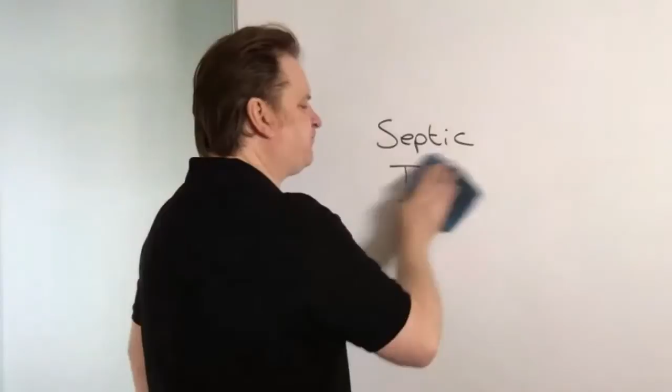All right, I'm going to give you a very, very good tip today. This is a very good tip in light of the septic tank ban that comes into force on the 1st of January 2020. I'm going to show you how to convert your septic tank into a legal, clean, safe system.

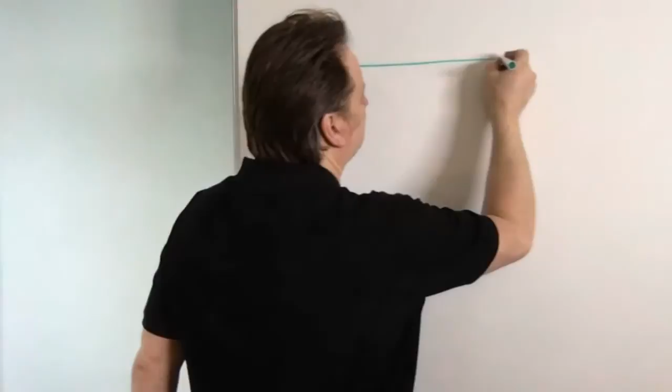So you're ready for this? Okay, here we go. So let's start off with some grass, right? All right, so that's some grass, okay.

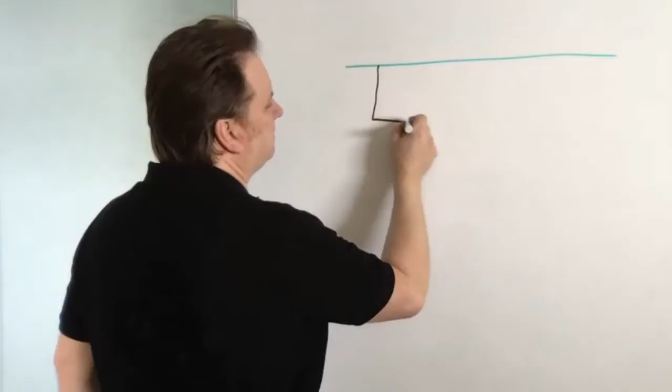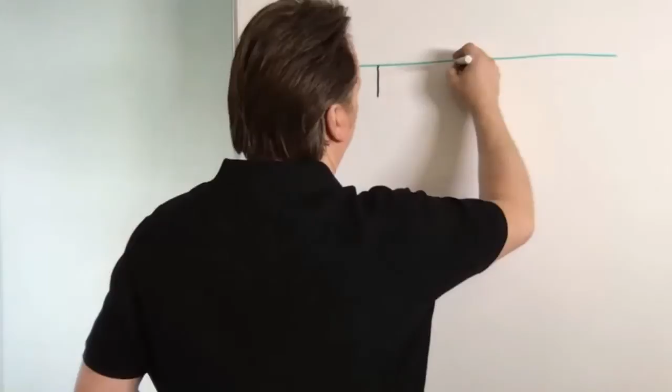And here, let's say, is your septic tank, okay? It's a bit skew-whiff, isn't it? But as you can tell, if you've been watching my broadcasts the last few weeks, art was never my forte. But let's try that again. That's a bit better, isn't it? All right, so let's say that's your septic tank.

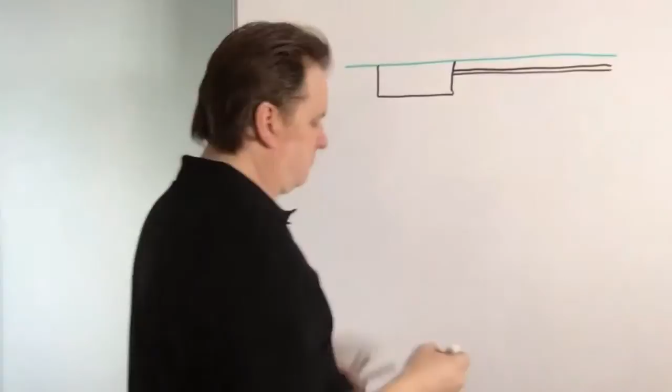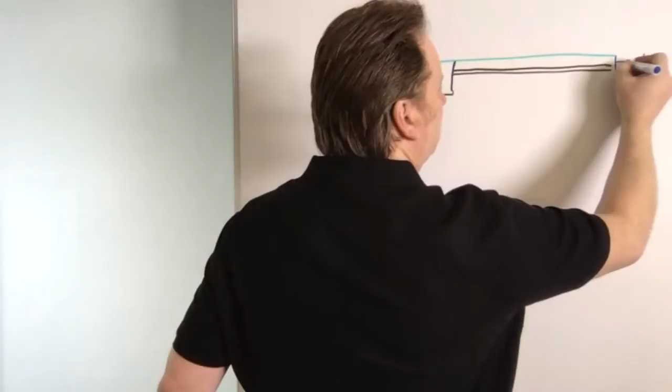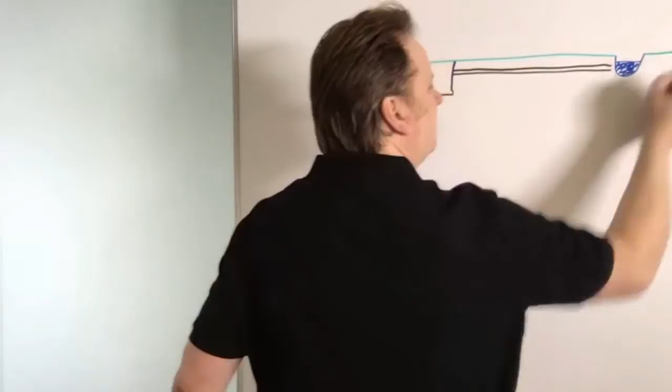Let's say this is your soakaway, okay? And let's say, right, this is... let's say that's the watercourse. So by watercourse, I mean river, stream, ditch, whatever, culvert, brook. Point is, it's a watercourse and the water goes somewhere. Okay, so in fact, let's just do that a bit higher. There we go. All right, so this is the inlet coming in.

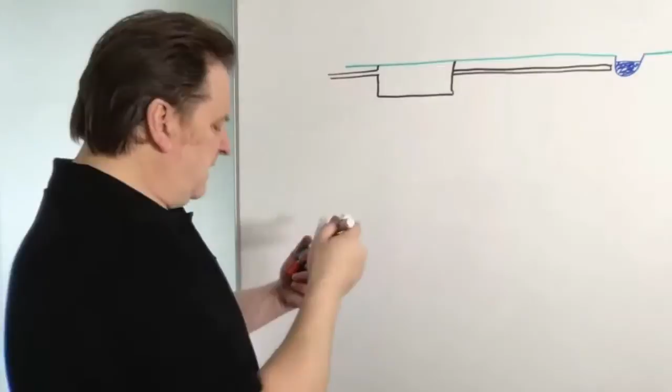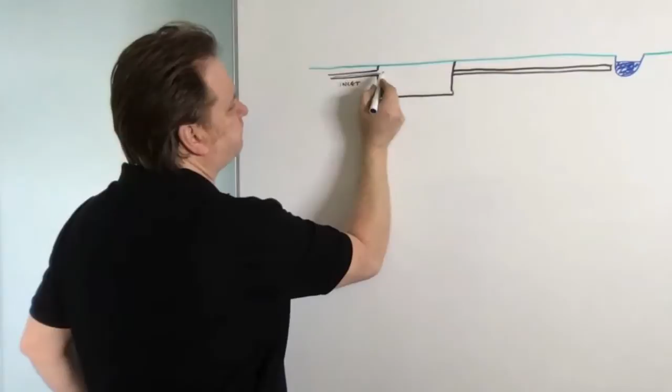To the septic tank, that's the inlet there. And so the house is obviously here. And if you don't know how a septic tank works, all the wastewater basically leaves the house. It comes down here and fills up the septic tank to about that level, okay? So that's typically how a septic tank works.

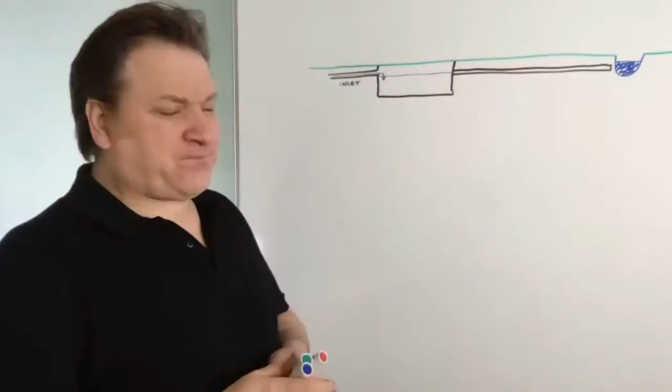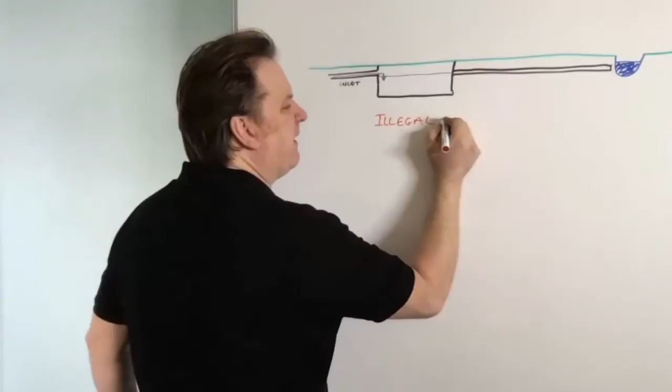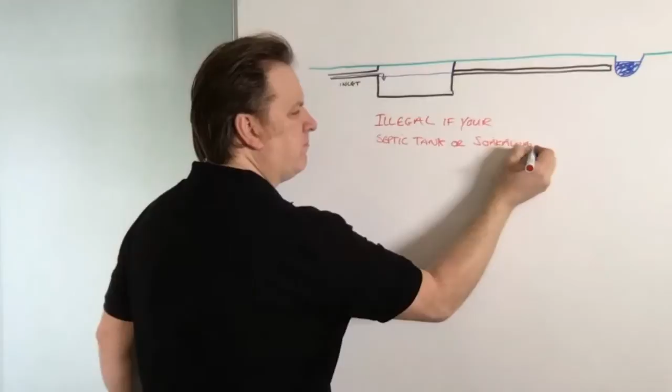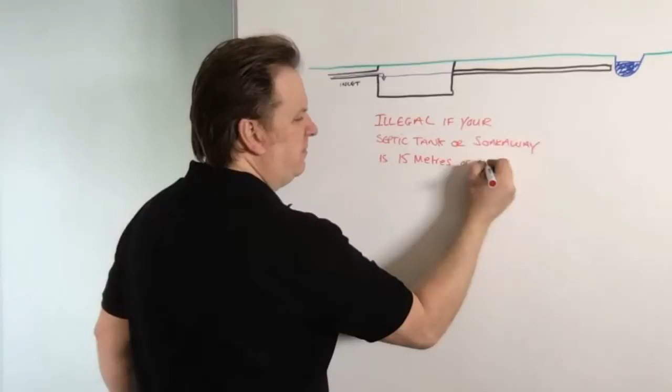Now, the new laws state that your septic tank is going to be illegal, right? It's going to be illegal. So let me just put that down. Very strong word, that. Illegal if your septic tank or soakaway is 15 meters or nearer to a watercourse.

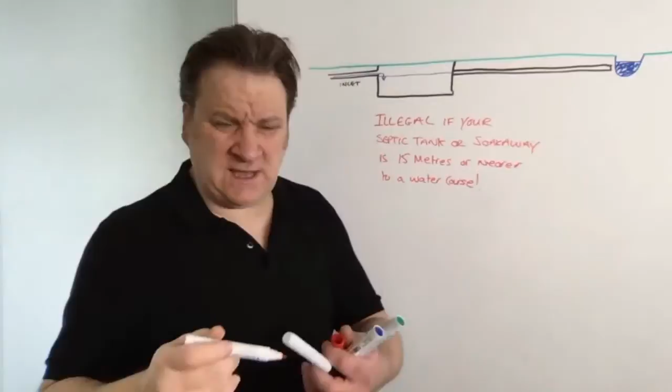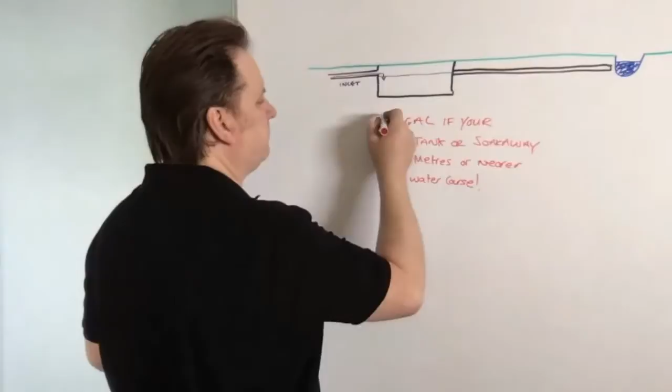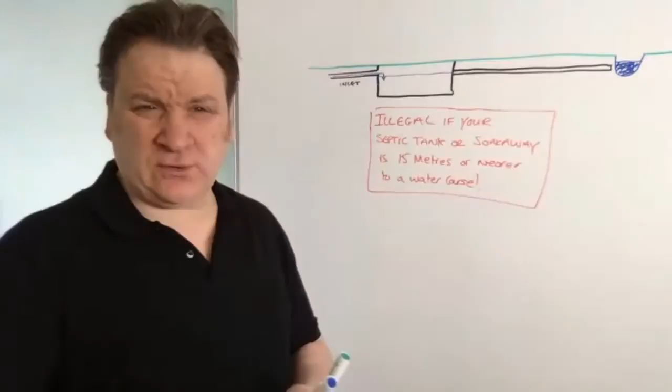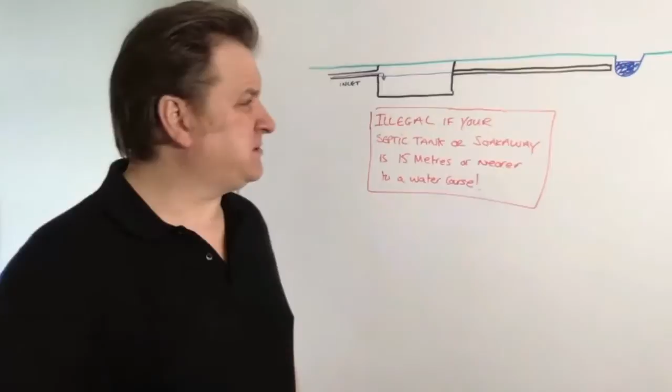All right, so I'll say that again. The government on the 1st of January 2020 say that if your septic tank or your soakaway is 15 meters or nearer to a watercourse, then your septic tank will become illegal. And they call it the septic tank ban because any septic tanks will be banned from continuing to put out raw sewage near that watercourse.

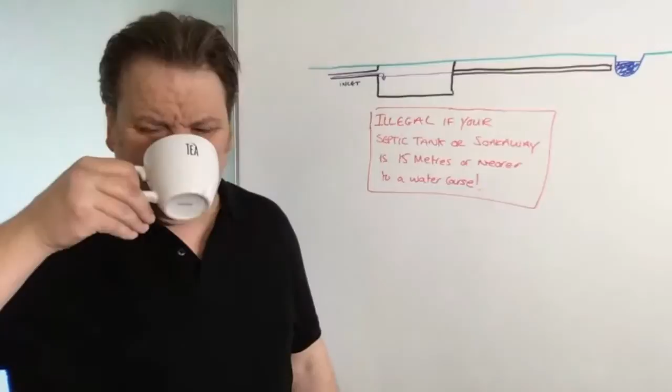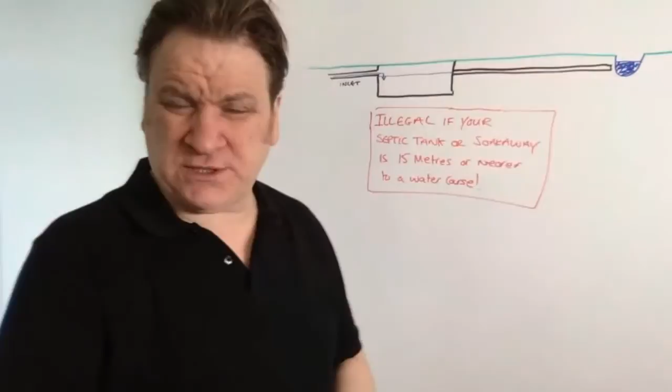They'll be banned from being used anymore. Okay, so just let me have another drink of this tea. That is nice. All right, so if you've got a septic tank and a soakaway that is in danger of polluting a watercourse, or let's say it is polluting the watercourse, what can you do?

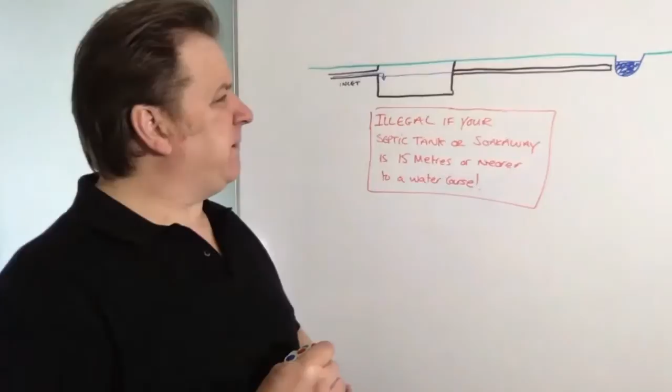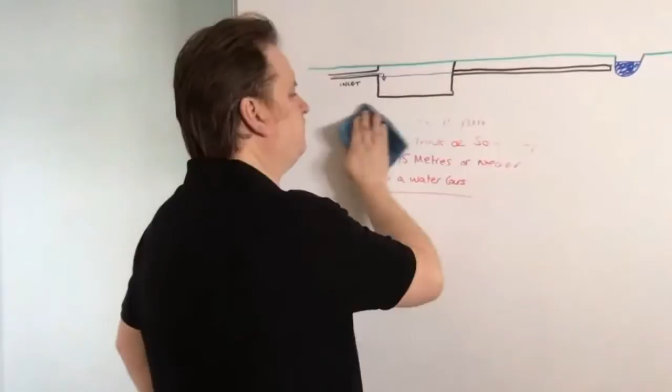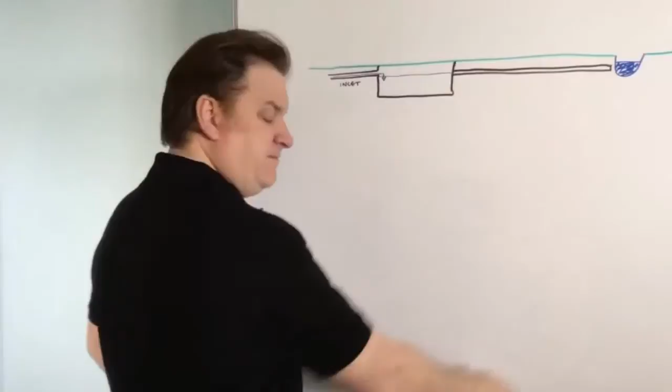What can you do about it? Well, it's a very good question, isn't it? So you've got two options, right? You've got two options in this instance. Well, option number one, and this will be the option that lots of companies will be trying to get you to take, right? It is an option. I'm not saying it's the right option, but nevertheless, this is an option.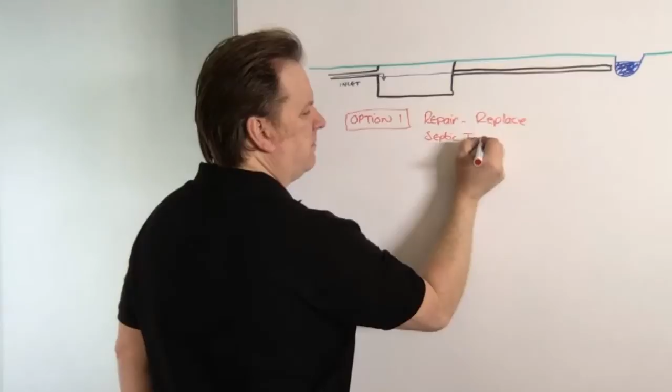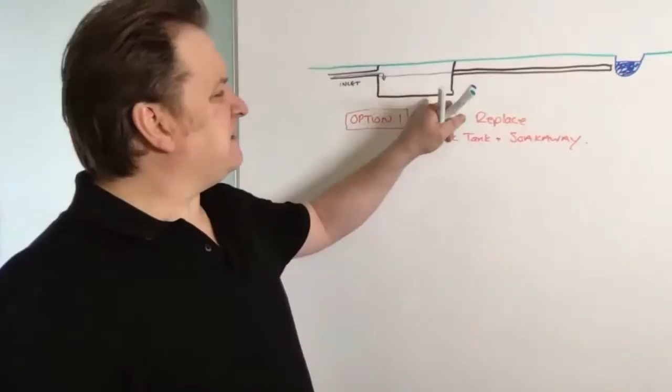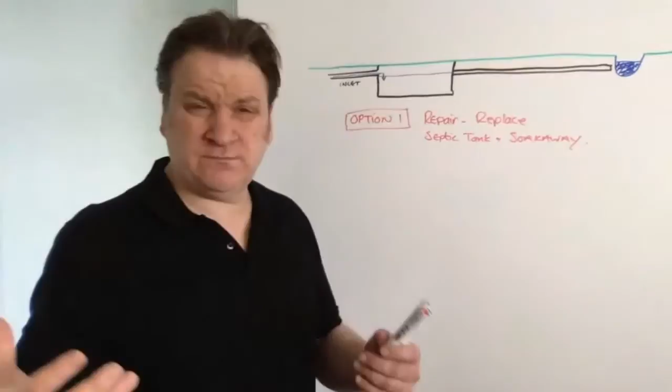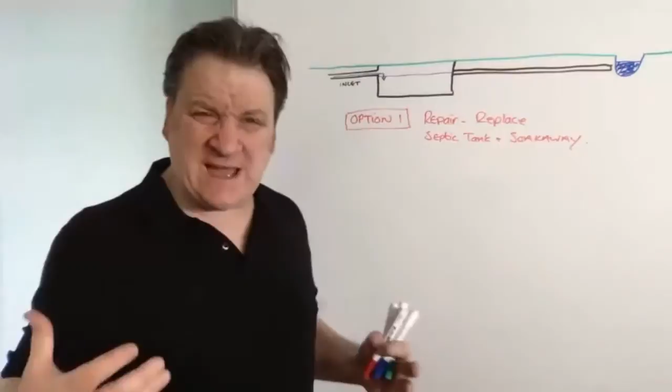You can repair or replace your septic tank and soakaway. So what do I mean repair or replace? Well, you could relocate the septic tank and you could relocate the soakaway, or you could just replace the whole lot. Or maybe it is on the boundary of 15 meters away, but for whatever reason, it's leaking out sewage and effluent. So you can repair or replace your soakaway.

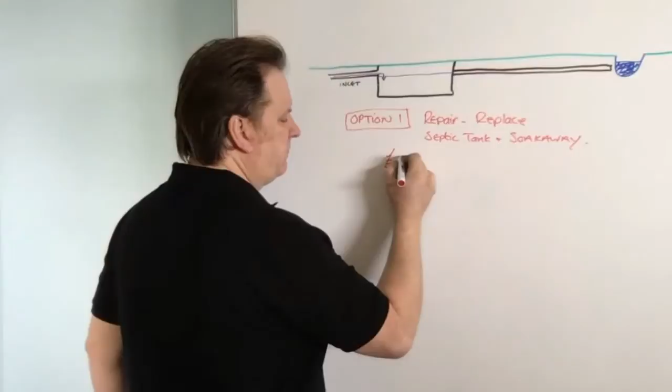Now, this can cost you anywhere from £6,000 to £16,000, right? And that's pretty much spot on, I reckon. That's the going rate, if you want to call it that. So that's one solution.

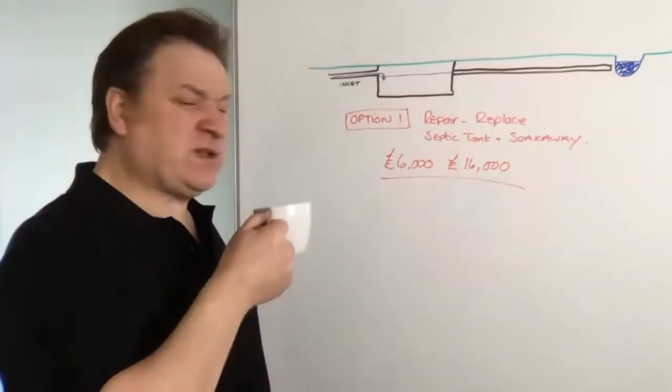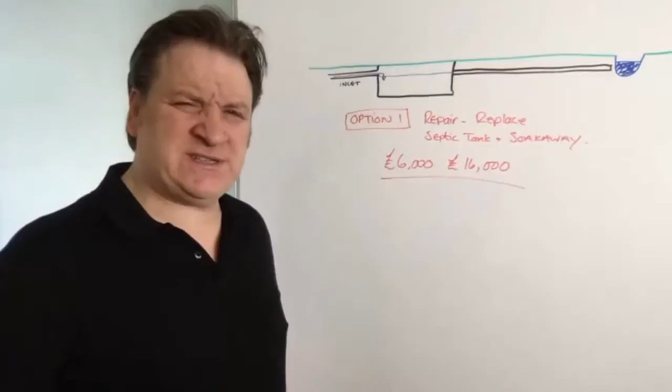And whilst in some cases it's a viable option, it's not the only solution to fixing that problem. There is an easier way, and it's called option 2. You don't really hear about this solution, but it's one I recommend and think is the best and simplest solution, if your septic tank system is in good nick.

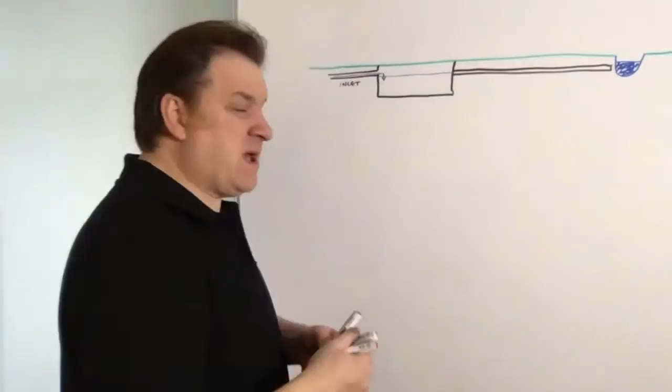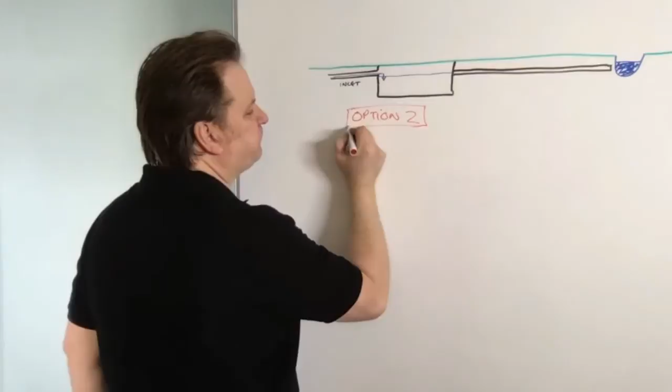All right, and this is what it's called. Have a look at this, this will blow your mind. Option 2: septic tank conversion unit. Wow, what's that? It sounds like something out of a science fiction movie. So, septic tank conversion unit.

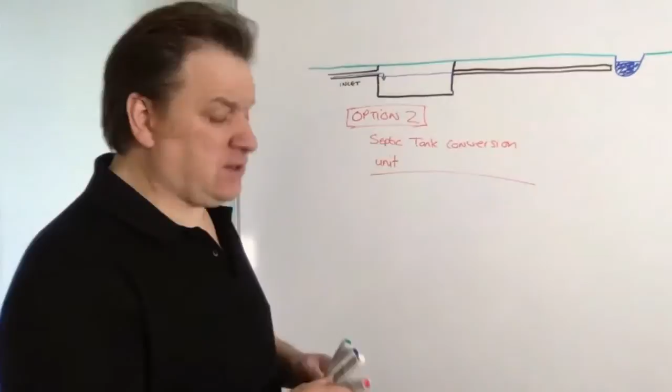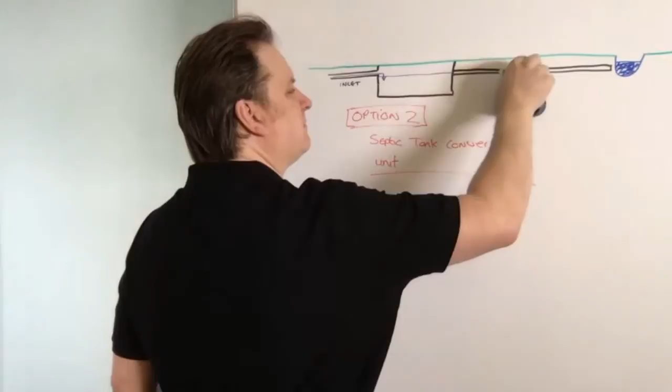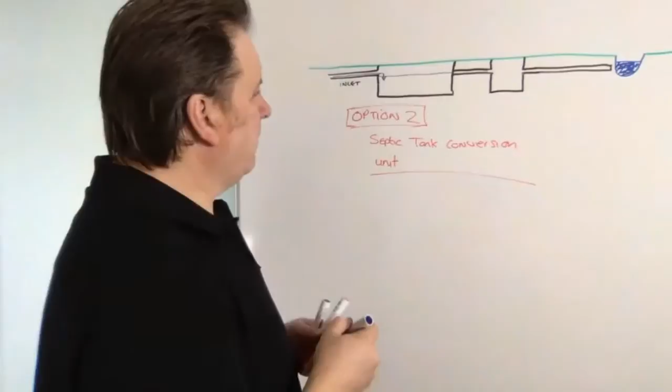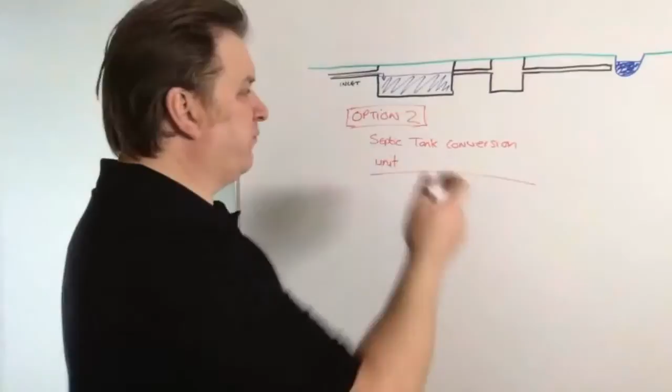And what that is, is this: in between the septic tank and the watercourse, you put a special unit that's certified by the government, like that. And what happens is all the raw sewage, all the solids and all the wastewater, still goes into your septic tank first. So it continues to do that, so you don't have to change your septic tank, you can just keep it going.

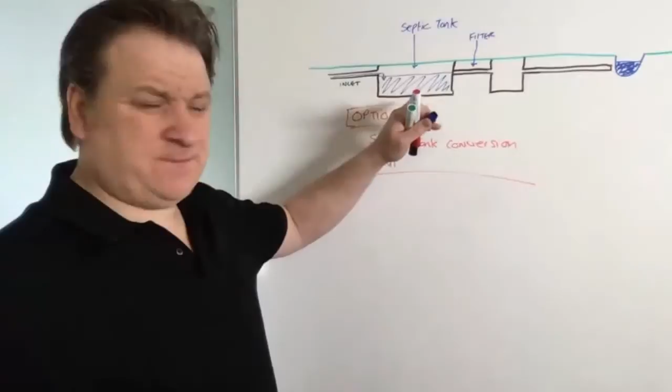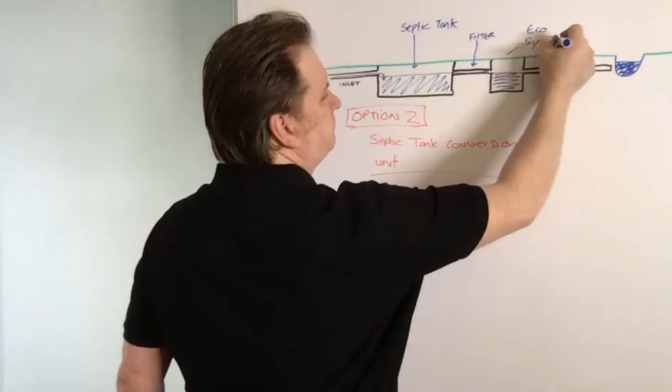Then what you do is put a filter at this point here, and what that filter does is trap and keep all the solids in the first tank, so only the liquid can go through into here. Now this is called the ecosystem. This ecosystem will clean and treat all that raw sewage, turning it into safe, clean water.

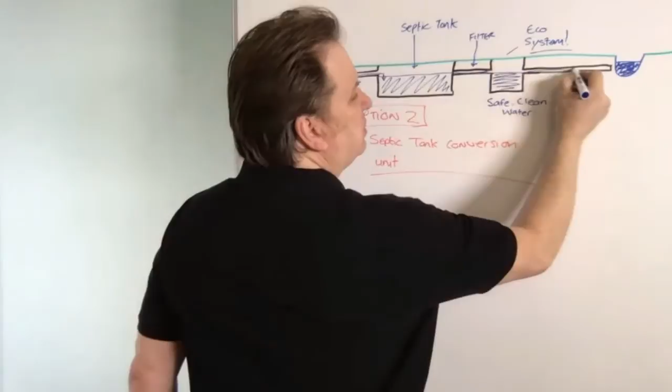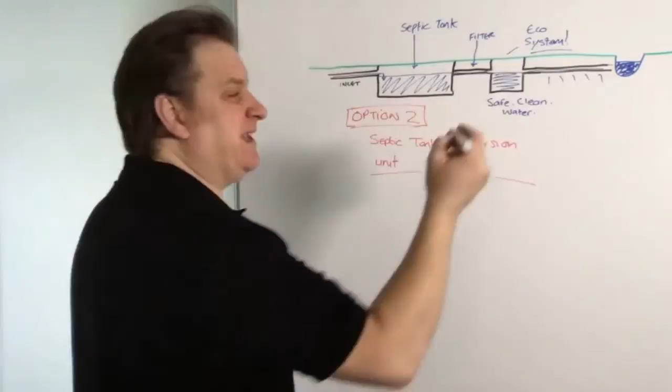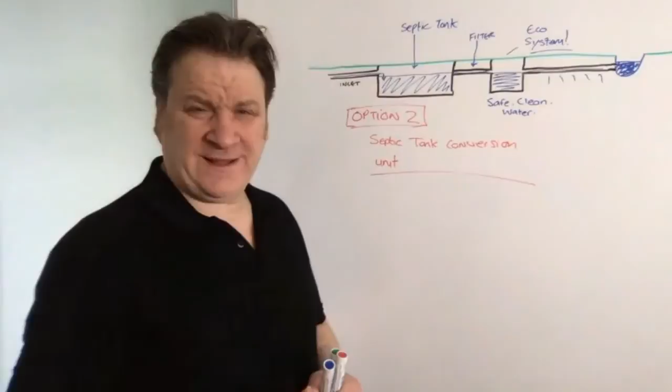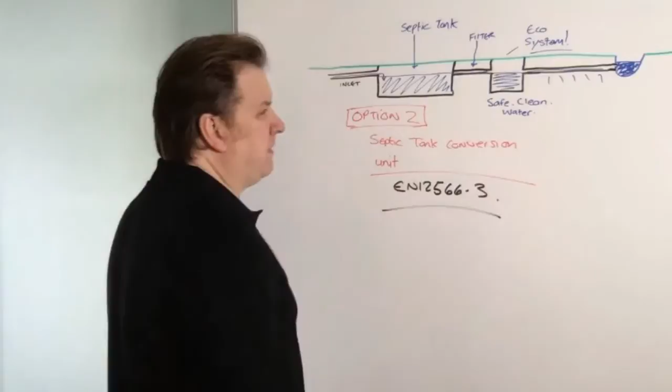That water can then discharge directly into your soakaway, which is next to your watercourse, or it can discharge directly into the watercourse. And it's fully government backed, fully approved by the Environment Agency and UK building regs. It comes with a certification called EN 12566-3, which means it's fully legal to discharge directly into a stream, a brook, a river, a culvert, anything like that. And yeah, that for me is one of the best fixes I've ever seen.

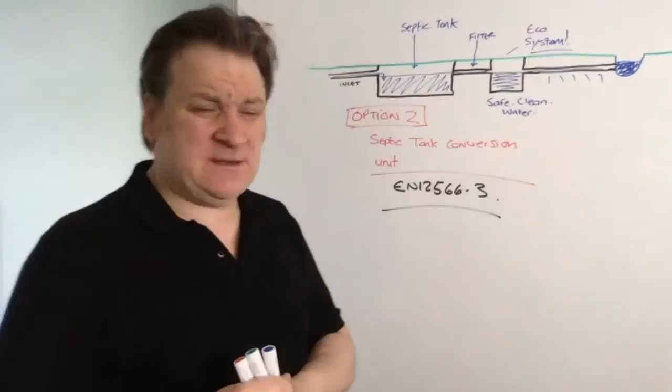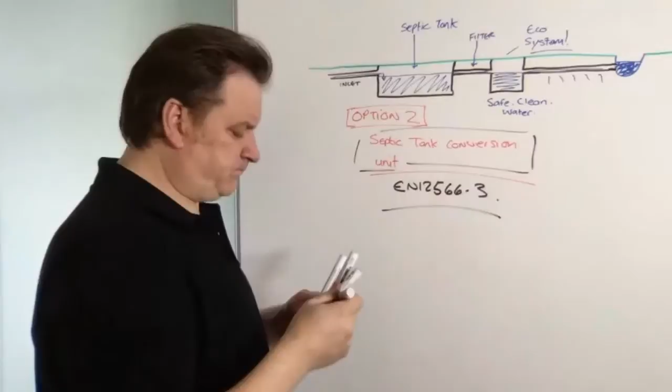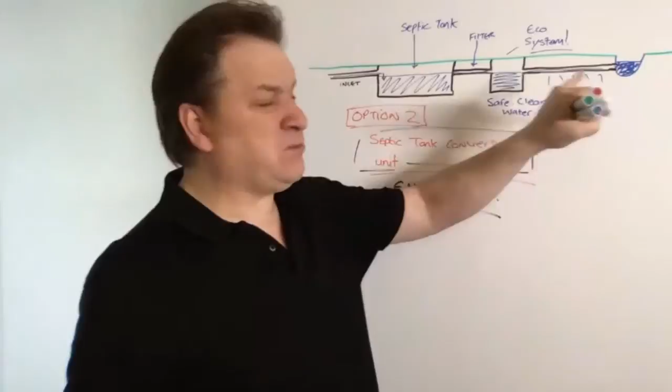So it's called a septic tank conversion unit, or conversion system. It turns and converts raw sewage into safe, clean water, which you can discharge into a watercourse. So if you go to septictank.co.uk, you'll see it at the bottom there.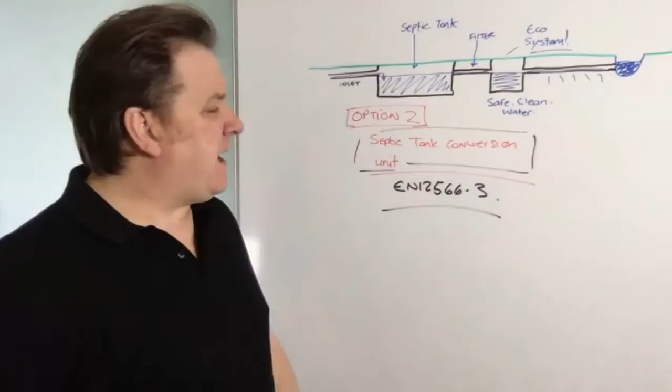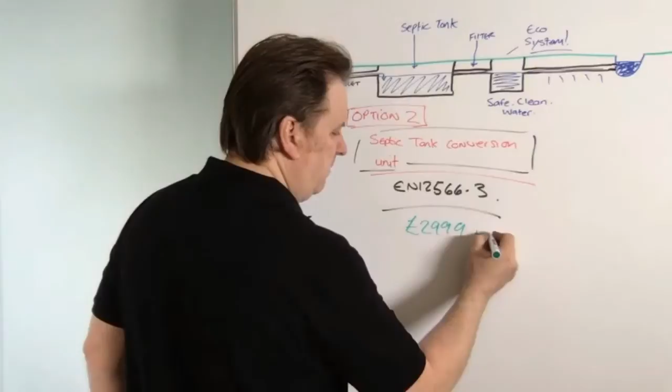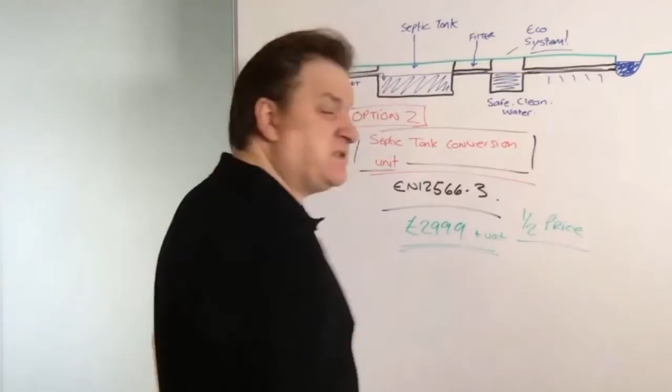It's called the ecosystem. And price-wise, that would help, wouldn't it, if I told you the price? They're like £2,999 plus VAT, so basically half the price of a new system, half the price of what a new system would cost you. And they're fantastic, they really, really are, I've put a few in. And the beauty is they don't run on electricity, so you can literally just drop it straight into the ground. So they really are fantastic.

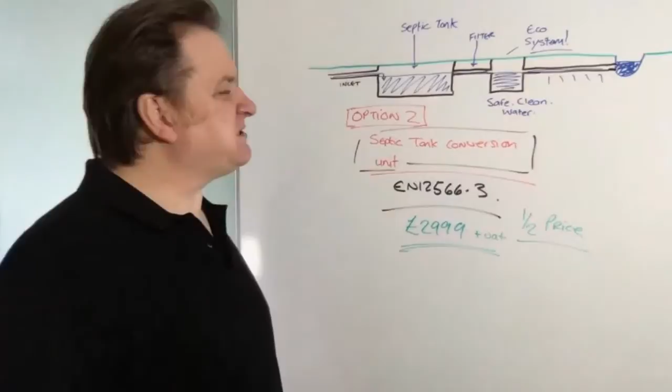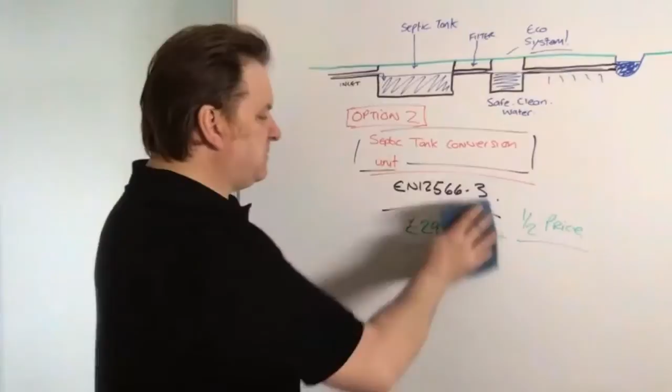And so there you go, I've just showed you an amazing solution, an option for how you can avoid replacing your entire system if your septic tank and soakaway are too close to a watercourse. So there we go, I hope that's helped. I know it does help because lots of people do buy this system, it's an incredibly popular system. It's made by the Germans.

And it's, as I said, called a septic tank conversion unit. I mean, number one, it's going to save you anywhere from 3,000 to 8,000 quid, and it makes your system fully legal. And so there you go, that's my tip of the day.